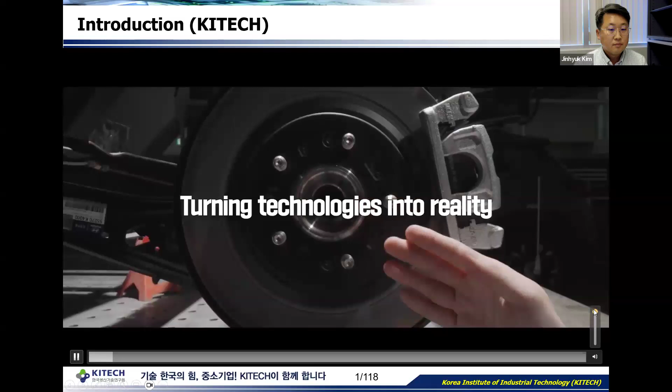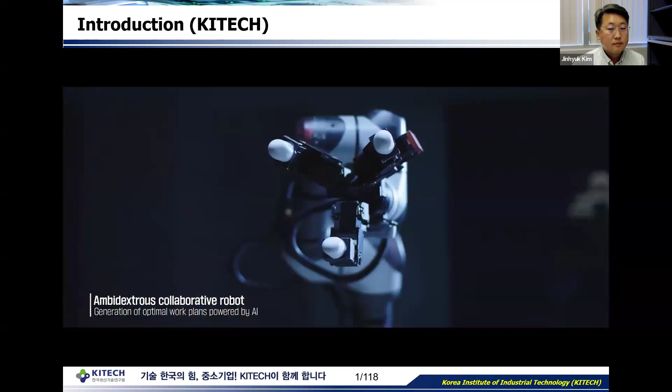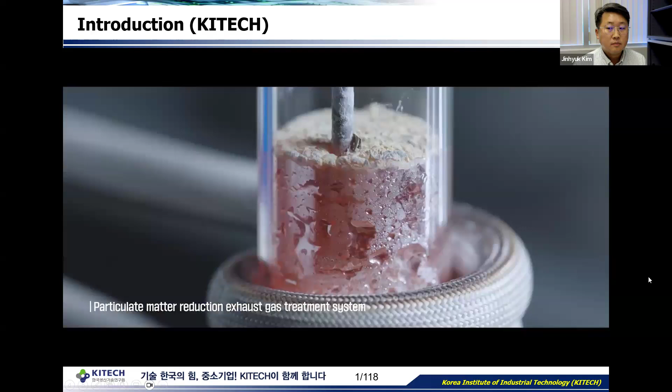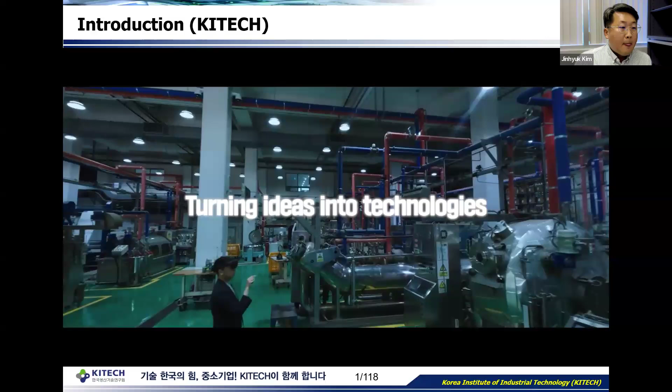What we expect is beyond what we can see, turning ideas into technologies and turning technologies into reality. We dream of future-oriented technologies. We are pushing the limits of production technology, the boundaries of the manufacturing industry, and beyond the carbon economy, leading the manufacturing paradigm shift with new values. Korea Institute of Industrial Technology is an innovator of industrial technology. Amid the rapidly changing paradigm shift in manufacturing, KITECH has grown to become a global partner in the innovative growth of the domestic manufacturing industry by developing technologies for autonomous manufacturing, servitization, carbon neutrality, and hydrogen alliance. We are redefining the productivity revolution to lead the value revolution in manufacturing. Beyond automation, we enable flexible and rapid production with autonomous systems and design optimized processes with digital twins to increase business competitiveness. We incorporate cutting-edge robotics and manufacturing technologies to create safe and reliable industrial environments. We're expanding business models by adding value to the manufacturing industry. We developed SMILE production technologies to help manufacturers enhance their R&D and design competencies and expand related services such as distribution and sales to generate high added value profits. We develop low carbon emission control technologies and industrial environmental management technologies through field demonstrations across various industries and sectors. Our research capabilities span the entire hydrogen energy cycle, including production, storage, transportation, and utilization. We seek to build a sustainable future driven by carbon neutrality and hydrogen alliance in response to global climate change. We enhance the global competitiveness of Korean manufacturing through strategic global collaborations. We are transforming the future of industrial technology by expanding joint research and human resource exchanges with overseas offices, as well as strengthening the link to commercialization through technology transfer and infrastructure development. We will accelerate the implementation of autonomous production systems by conducting joint research with leading technology countries, preparing for a sustainable future by developing integrated hydrogen and carbon system technologies. We contribute to the creation of industrial and innovation ecosystems by supporting domestic small and medium-sized manufacturers' global expansion and promoting industrial technology innovation for local manufacturing. The future is shaped by many technologies, but our path is singular. A path that transforms ideas into technologies and technologies into reality. A path leading from traditional manufacturing to an era of unprecedented value creation. At the forefront of this journey, KITECH will advance beyond production towards true value. Korea Institute of Industrial Technology.

This is a very interesting animation because we recently updated it. So, Korea Institute of Industrial Technology is a South Korean government research institute that supports advanced technology for domestic industry in Korea. KITECH is mainly focused on developing and managing manufacturing technologies for small and medium enterprises in Korea. We now also have a branch in Silicon Valley, San Francisco, so we always welcome collaboration on research work together.

Now I'm asking you, what is turbo machinery? We can say turbo machinery is rotating machinery like fans, compressors, pumps, turbines, and gas turbines, and so on. Wikipedia defines turbo machinery as machines that transfer energy between a rotor and fluid, including both turbines and compressors. A turbine transfers energy from the fluid to the rotor, while a compressor or fan transfers energy from the rotor to the fluid.

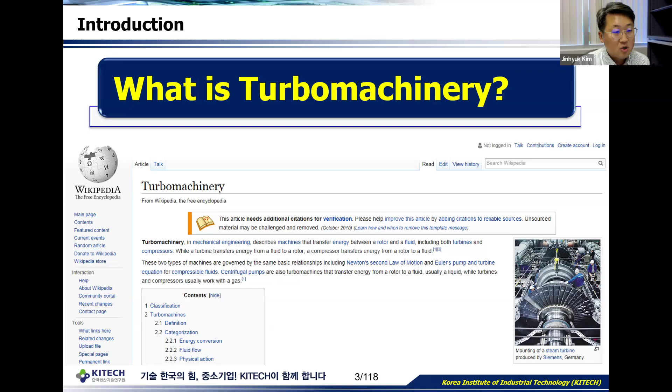CFD means computational fluid dynamics, which is a section of fluid dynamics in mechanical engineering. However, with the recent development of computing power, CFD is rapidly being used to solve fluid mechanics problems in detail. CFD can also replace direct experimental testing to design an initial model or optimum model in more detail.

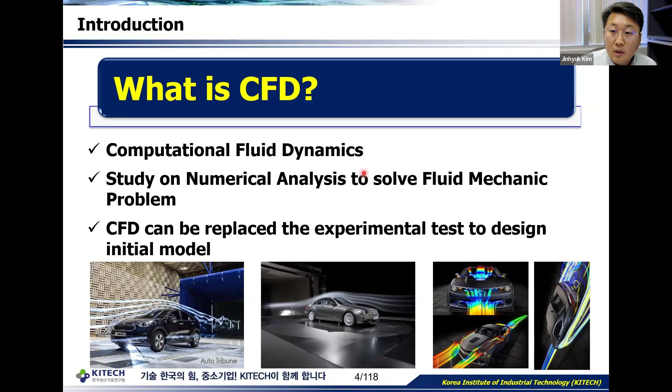Okay, so I will do next slide.

If we use CFD, we can design all kinds of turbo machinery like fans, compressors, pumps, hydraulic turbines, and pump turbines, because we can easily understand the internal flow characteristics using CFD techniques. There are many types of turbo machines, like centrifugal type, axial flow type, regenerative type, and mixed flow type. They are employed to achieve the best performance for various types in the requested field.

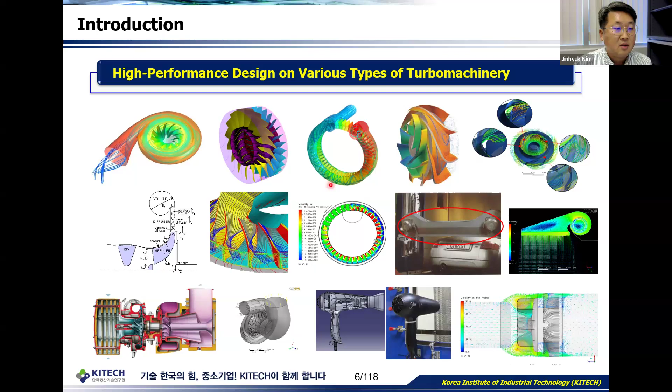So this is the introduction. I have professional skills and work capabilities for fluid machinery like fans, compressors, pumps, hydraulic turbines, and pump turbines. I'm also very interested in investigating internal flow characteristics and flow physics using unsteady CFD techniques.

I'm also very interested in analyzing performance using flow visualization. I have practical hands-on experience with energy machinery through experimental and analytical investigations. I have successfully performed more than 34 research projects, and I'm currently doing 2 research projects as principal investigator. I have also published more than 120 technical journals and more than 75 patents on kinds of energy systems.

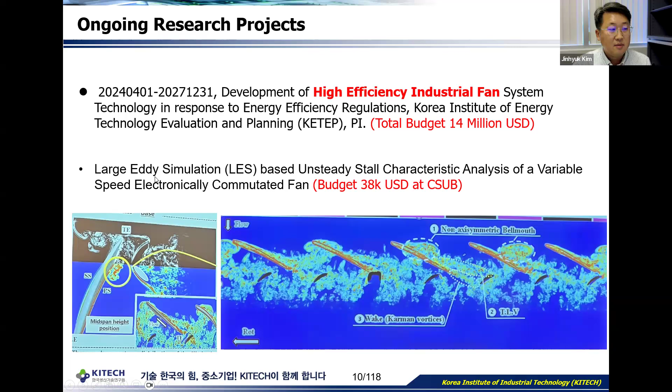In the first project, I brought small research items to do work at CSUB. Now I'm doing research work together with Dr. Gyeong Sung Kim, who is a faculty member at the Department of Physics and Engineering, to investigate unsteady stall characteristics analysis based on variable speed electronically commutated fans using LES large eddy simulation techniques.

In the second project, I brought small research work for investigating cavitation flow analysis of axial flow pumps using unsteady large eddy simulation techniques.

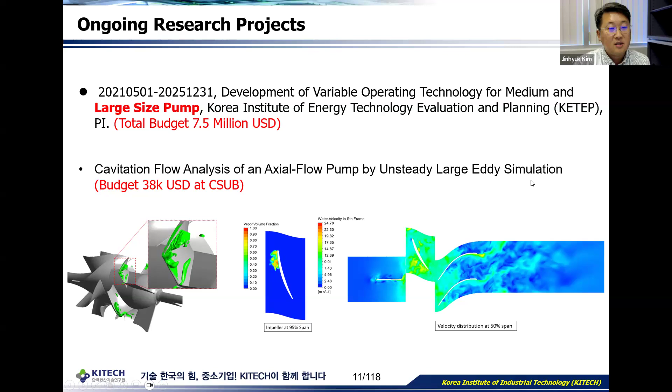I'm very interested in developing various fluid machines using experimental and CFD methods combined with design optimization techniques. My research field covers fluid machinery, aero and hydrodynamic and aeroacoustic designs for compressors, fans, pumps, hydraulic turbines, and pump turbine units, based on unsteady flow visualization and experimental techniques, as well as advanced statistical optimization techniques.

So this is the next major research. Right now I'm trying to develop various pump types: single channel pumps, two vane pumps, and axial pumps. Almost all these pumps are already commercialized in Korea now.

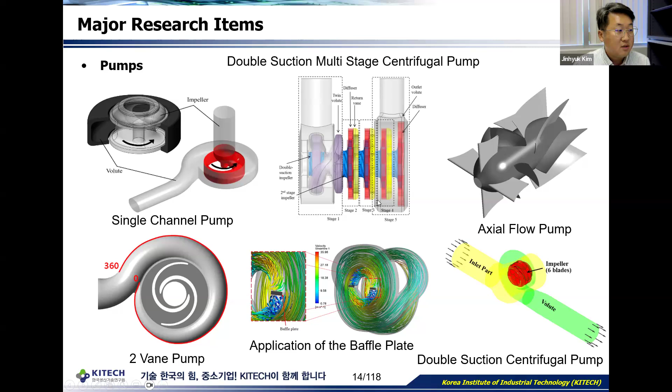Recently we have constructed an experimental test facility to investigate the internal flow characteristics and physics mechanism in more detail. We have also captured the cavitation phenomena as shown here, and we are analyzing it in more detail using unsteady CFD techniques. Since we got good results, we recently published a paper in Physics of Fluids. You can see our affiliation with CSUB here. This paper was published in July this year.

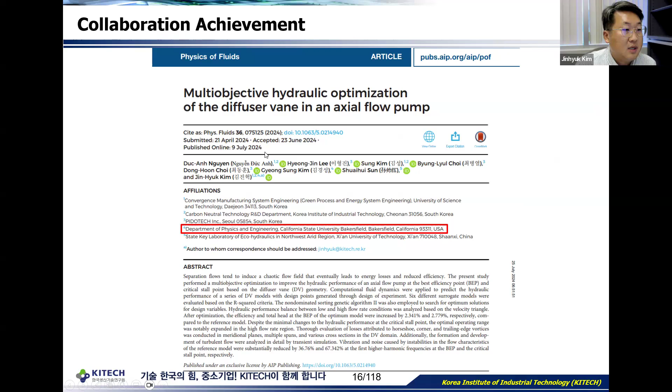This is also one of my research items. I'm working on aerodynamic machines, specifically compressors used for vacuum cleaners and gas turbine systems. But I will skip this part because of limited time now.

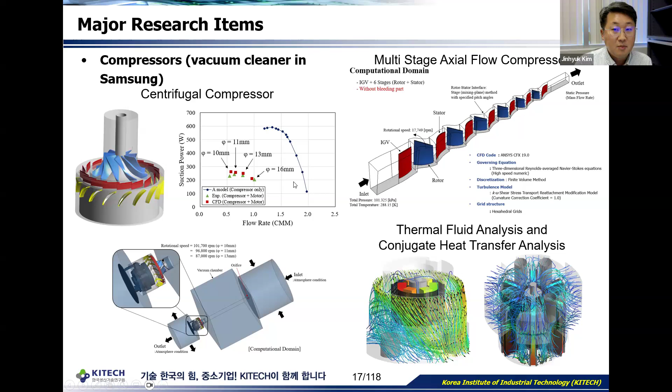You can see here, this is one of my ongoing research works for designing a hydraulic turbine with a very low head condition. If we use only kinetic energy, we cannot get more power because of the Betz limit law, which is one of the basic theories in fluid machinery. However, if we use both kinetic and potential energy in the turbine, then we can get more power.

Recently we have installed a gate here for making an artificial head, so we can also make potential energy. Recently we completed the experimental test here, and finally we got 30 kilowatts of power from this turbine at this river site.

We have also published papers in the Energy and Heliyon journals. If you are interested in this work, you can download them freely on the website.

Anyway, now I will talk about the single channel pump, because this pump is very unique and this is a very interesting topic. I will show you briefly now.

A general submerged pump for wastewater treatment can treat various wastewaters from industrial and living sewage. However, the existing blade type pump has many problems, especially breakage and breakdown because of clogging phenomena. When we encounter clogging problems, pump efficiency first decreases with motor overload, impeller abrasion, and pump damage occurs.

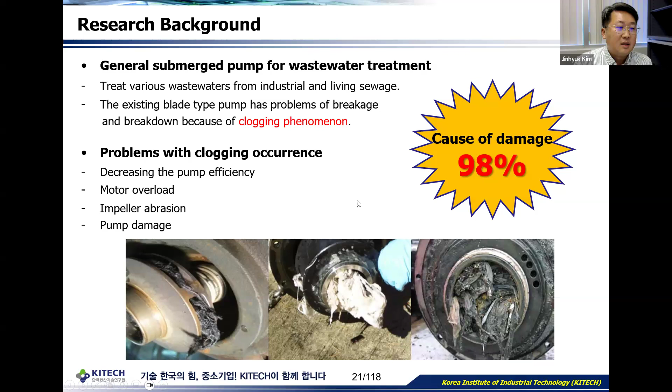This accounts for almost 98% of breakdowns in this pump. So how can we prevent the clogging problem in the pump?

Firstly, we can consider increasing the impeller size. If we increase the impeller size, we can meet the space limitation, but pump input power also increases, and cost will be increased as well.

Then we can consider installing a grinder in front of the pump inlet. But this also has a problem because of clogging at the suction with grinder blade operation.

So we can think to use the multi-vane impeller. However, if we use the multi-vane impeller, we cannot secure the flow path because we have to send solid materials through this pump. If we use a vortex pump, we can secure the flow path, but pump efficiency is decreased because of the small impeller.

So we have to develop the single channel pump for increasing higher efficiency and to send solid materials smoothly.

This is the design theory for the single channel impeller and volute, based on the Stepanoff theory, which is one of the basic theories for designing fluid machinery. At this time, I have also invented a design method for the cross-sectional area shape and distribution for designing the high efficiency model.

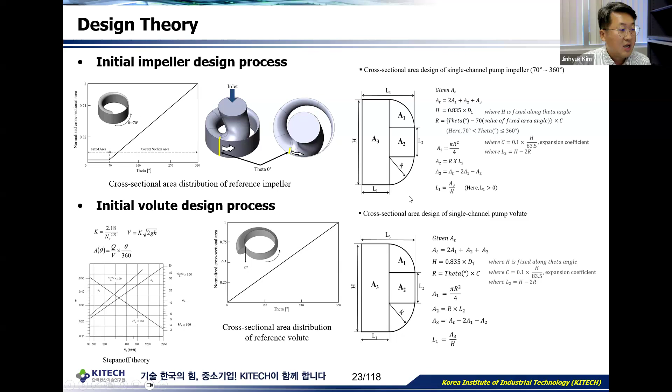So we can think about the optimization procedure to improve the performance of this pump. Firstly, we define the problems, for example, geometry generation, grid dependency test, and performance validation.

Also, we can choose the objective functions. In this work, we have to simultaneously increase hydraulic efficiency and reduce fluid-induced vibration, because this pump has a non-symmetrical impeller shape. Since the non-symmetrical impeller shape is rotating, we can get very big fluid-induced vibration. So we have chosen three design objective functions: hydraulic efficiency, the sweep area of radial force during one revolution, and the distance between the origin and center point.

If we minimize these two objective functions, we can directly reduce fluid-induced vibration caused by rotor-stator interaction. We also choose the design variables.

At this time, I have chosen 5 design variables for smoothly changing the cross-sectional area distribution for both the impeller and volute, using the Bezier curve. Then we employ the Latin hypercube sampling method, which is one of the design of experiments methods, to make the combined design points.

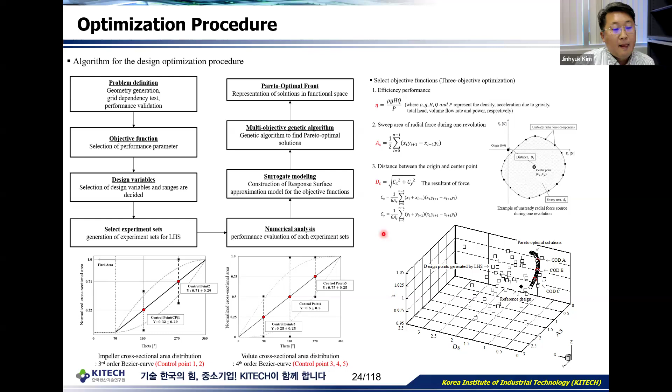Also, this is the radial force source distribution. You can see the COD-A model is decreased considerably, and the radial force is rotating almost near the origin of this graph. This is also the unsteady radial force fluctuation during one revolution of the impeller. You can see the COD-A model has an almost uniform shape.

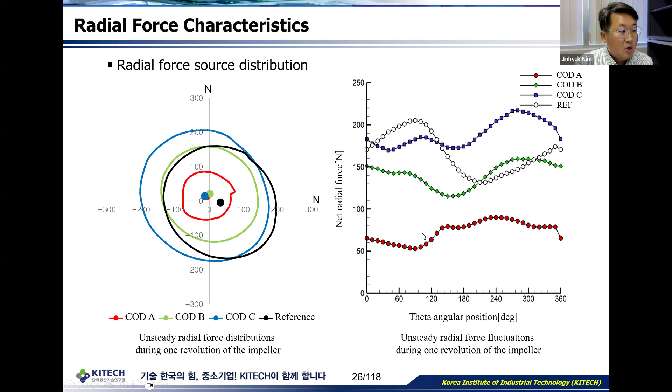A few years ago, I published a book chapter about our new technologies, titled 'State-of-the-Art Design Techniques of the Single-Channel Pump for Wastewater Treatment.' If you're interested in my new design technology, you can freely download it from the website.

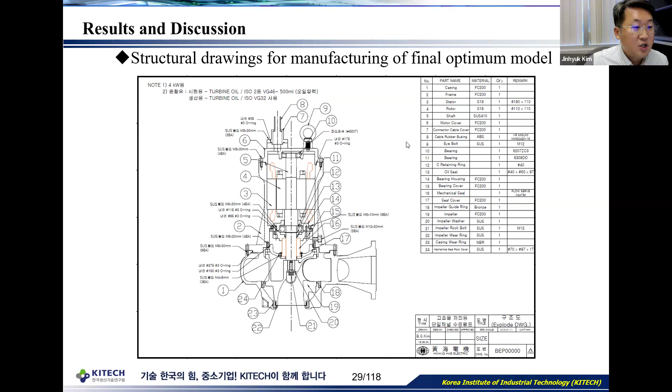This is the structure drawing for manufacturing the optimum model, since we have to verify real performance for commercialization. This is also the three-dimensional modeling for manufacturing our final optimum model, along with the structural analysis for manufacturing.

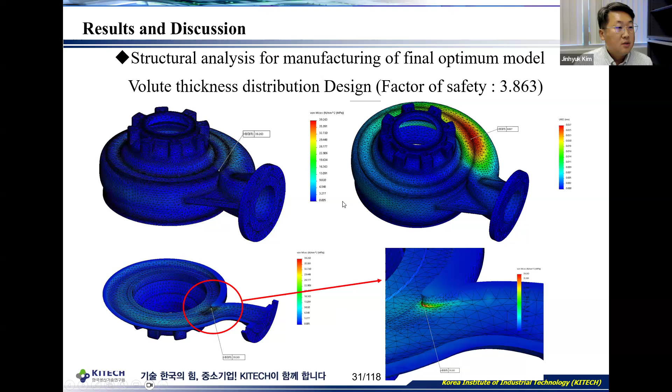Rotor dynamic analysis is also very important, because we have to decide the location of the bearing and the thickness of the shaft shape and axis, as well as check the dangerous velocity zones.

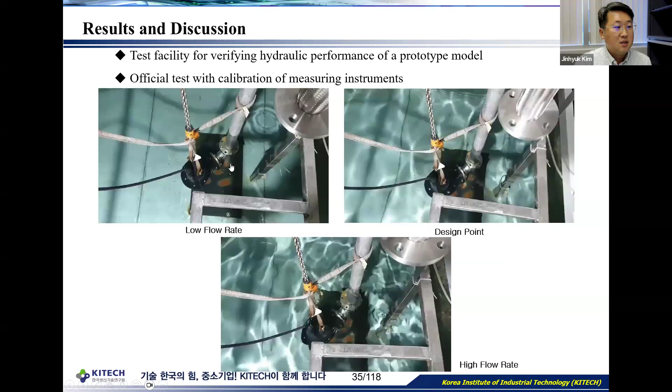Vibration was reduced remarkably here. The wave on the surface is due only to the discharge flow rate from the outlet pipe. So we got a very good result.

We got also good results and found the very low fluid-induced vibration mode right here.

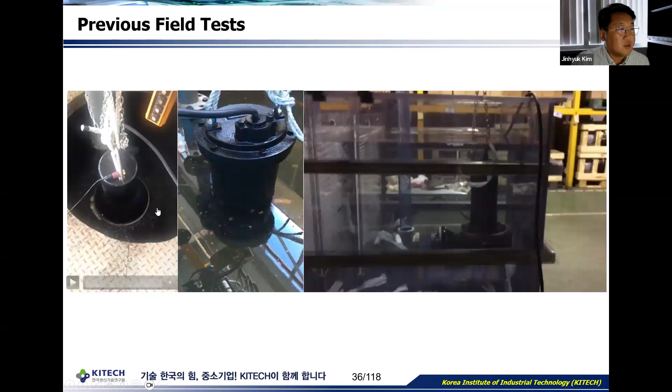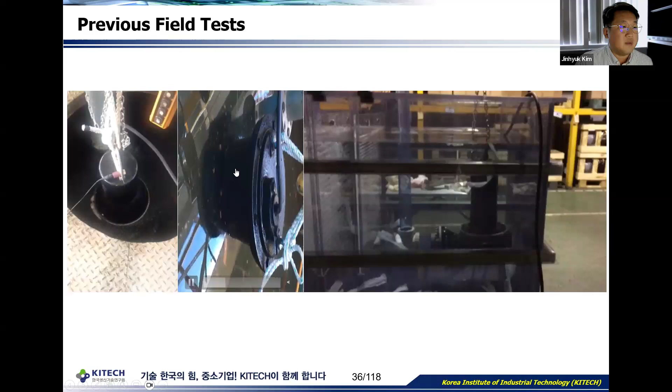For clearly explaining now, you can see here the left animation. If we do not consider our design techniques, then there are so many vibrations caused by fluid-induced vibration due to the rotor-stator interactions. However, if we consider our design techniques, then you can check that we got a very low fluid-induced vibration mode right here.

We have also checked sending wet tissue as the solid materials. You can see here, wet tissue is also smoothly driven right here. So we already verified all performances tested.

Several years ago, we announced this achievement in media reports and newspapers in Korea. Also now our pump is already commercialized in Korea, and there are so many fields and applications using it.

Also, you know, in Jeju Island, this pump is being used popularly.

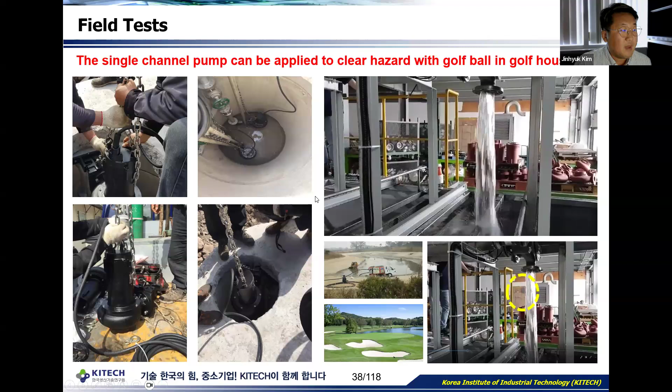So there are so many applications. Recently our pump is being employed in many golf houses in Korea now.

At this time, we got many good results from this research work, so we have published so many papers. If you are interested in this research work, you can download them from our previously published papers.

This is also ongoing work, because this pump can also be applied as a turbine. If we use this pump as a turbine, then we can also get power from the wastewater with solid materials.

This is also very popular, because recently a Japan company asked me if it is possible to design or develop this single channel pump as a turbine for wastewater treatment, for generating power from the wastewater. So now we are researching this together.

Now, the positive displacement turbine. Actually, the winter season in Korea is really cold, so we are always using an indoor system like the Korean floor heating system.

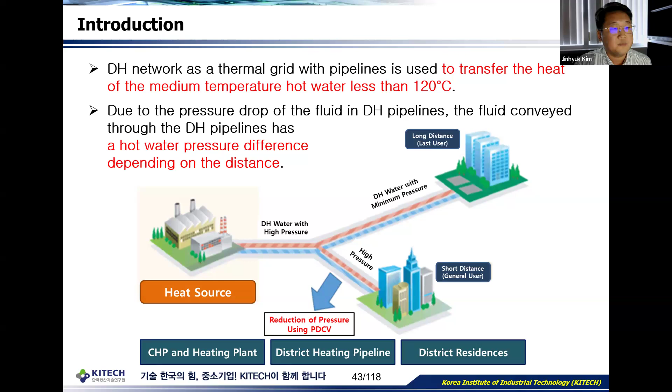Due to pressure drop of fluid in the district heating pipeline, the hot water has different pressure differences depending on the distance. So in the district heating system, the pressure differential control valve is very important, because it supplies constant flow rate from the hot water pressure difference, and also protects equipment like the heat exchanger from high pressurized fluid, and regulates the pressure at each point so fluid can be supplied remotely.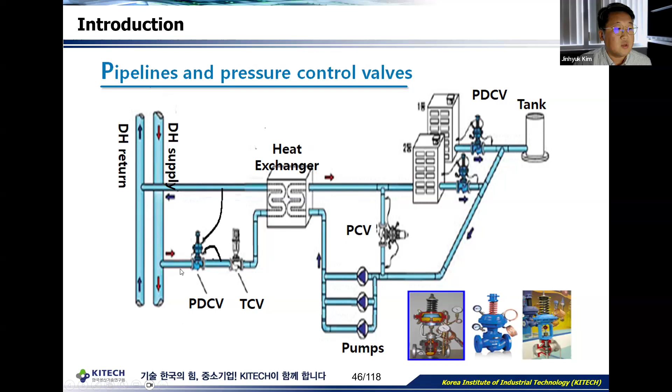Instead of removing these control valves, we can install a bypass line here to install a hydraulic turbine to control the pressure level. If we use the hydraulic power generation system at this site, then firstly we can get some power from the pressure level, so we can supply power to the user, and also save energy.

So the hydraulic turbine system is suitable as a replacement for the positive pressure differential control valve in district heating substations. There are so many advantages. For example, if we use the hydraulic turbine system, firstly we can control the pressure and temperature, and also supply the pump inverter to send power.

This is most important for measuring the flow rate, because in the heating district system there are very complicated conditions. They need very hot water, very high pressure, and very low flow rate. So if we install a flow meter to check the flow rate, the flow meter may break. So we have to check the flow rate efficiently by using a hydraulic turbine system.

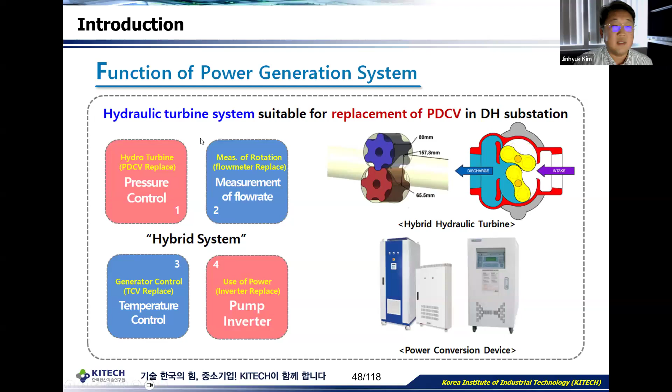I will introduce this briefly now. This is the specific speed. When we check the specifications for designing a hydraulic turbine, first we have to check the specific speed, because specific speed can decide the turbine shape or turbine type.

If the specific speed is very big, we can choose the axial flow type. However, if the specific speed is very low, we have to choose the gear type. As I told you previously, this condition is very complicated. Specific speed is low because high pressure and lower flow rate are required in this condition, so we have to choose the gear type for designing this turbine.

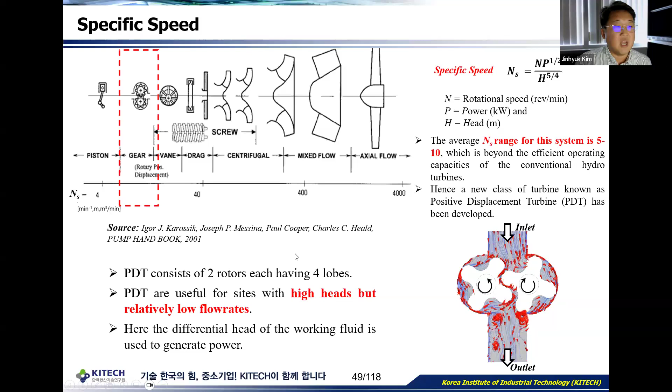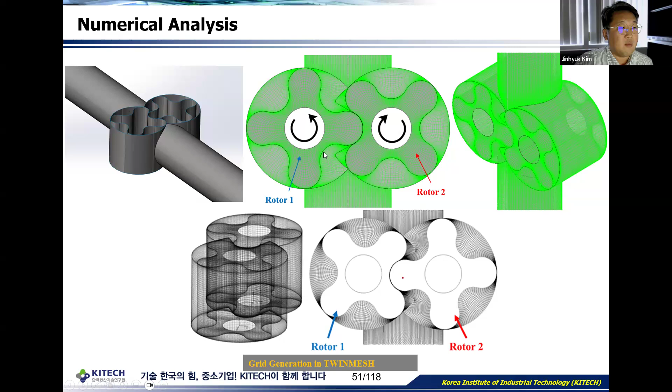I generated a mesh for calculation using CFD, and employed the moving mesh technique. This is an example of our result. You can see high pressure coming here, then two rotors rotate due to the high pressure, and the two rotors gain some energy. Then low pressure goes outside from the outlet right here.

But this is very interesting. You can see there are very big separation zones at the outlet here. These separation zones have an adverse effect on the performance of this turbine, so we have to reduce this adverse effect to improve the turbine performance.

When we check the result for this reference turbine, there are big pressure fluctuations right here, at the inlet and outlet, because this turbine shape is based on the rotor lobe type and the straight type. When we look from the outlet, the area always changes, and this can create much higher pressure fluctuation.

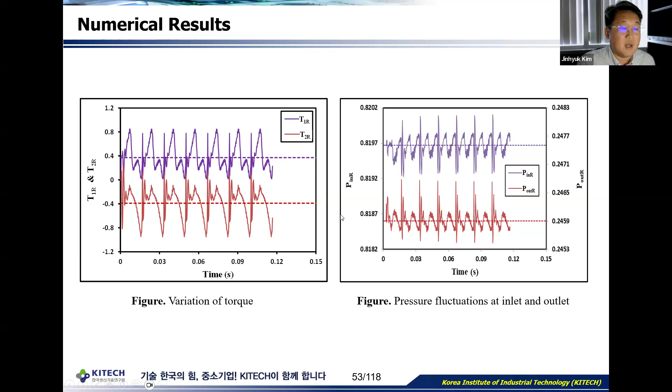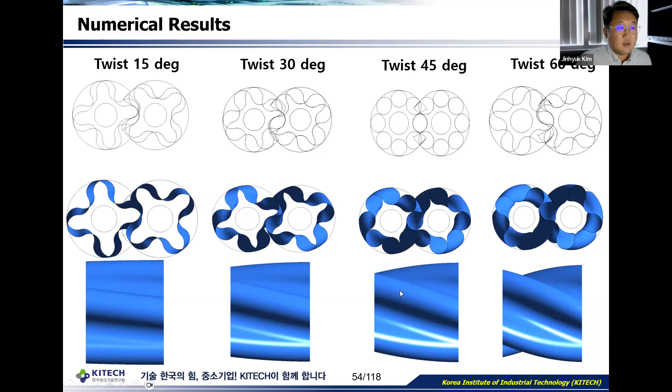So how can we reduce the fluctuations from this turbine? We tried a parametric study with the twisted angle from 15 to 60 degrees, like a screw type shape. If we use the twisted angle model for this turbine, we can considerably decrease the pressure fluctuations. Especially the 45 degree twisted model can reduce it perfectly.

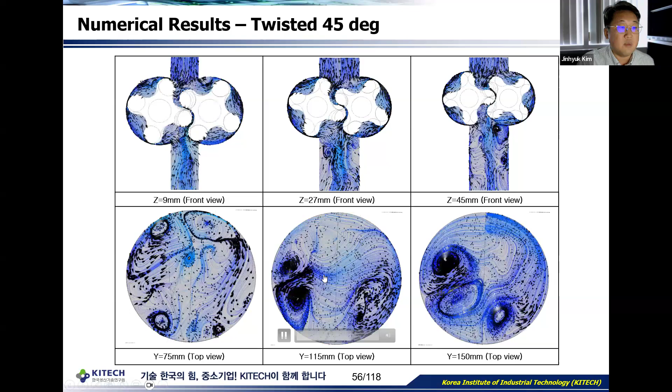This is the example for the result of the flow characteristics. You can see if we use the 45 twisted rotor shape, when we look from the outlet, the area is almost the same as the rotation of the lobe. Also the pressure fluctuation can be reduced perfectly like here. So this is a very simple idea.

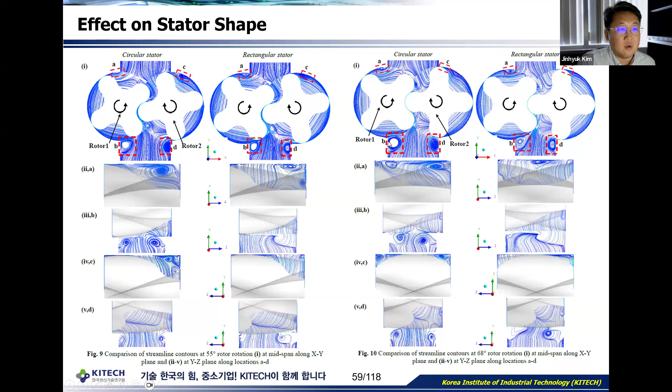We also checked the internal flow characteristics. This is the example - you can see here the two separation zones were reduced considerably compared to the previous model.

We also checked the effect of the clearance size, because clearance size is very important for the turbine performance. Also, since we are handling hot water, we have to consider the heat expansion rate for both the rotor shape and the casing shape, because the two shapes use different materials. So we also have to check the clearance size.

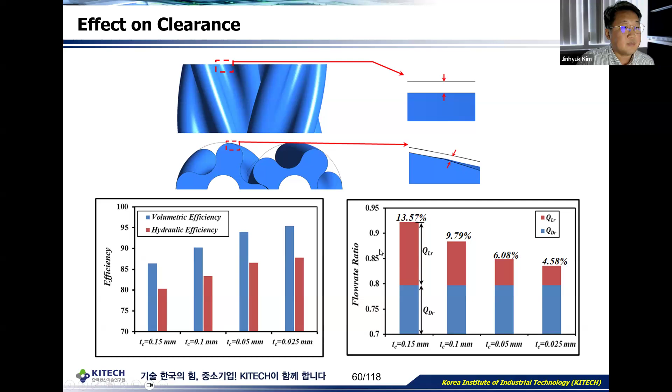So this is also the schematic diagram for the experimental test. This is the main tank, and I have installed a heater to increase the temperature. Also, this is the booster pump for making the artificial head, and these are the two reservoirs. This is our prototype model, and we can install pressure and temperature sensors from inlet to outlet for checking some parameters.

And this is our turbine, and we can install the RPM sensor and torque sensor to check exactly the turbine output. This is the generator, and we installed a load bank for controlling the power by using many resistances.

Also, this is the magnetic flow meter to measure the flow, and we can also install a heat exchange reservoir to control the temperature inside, because this is a closed loop system. So when we do the experimental test for a long time, the temperature will increase, so we have to control it using the heat exchange reservoir right here.

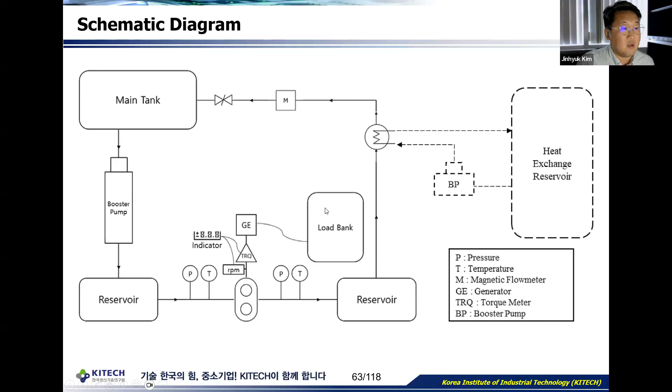So I have manufactured all devices right here in my institute, and I have tried the experimental test exactly. At this time, all devices were calibrated to get accurate data. So this is our final prototype model.

You can see here, high pressure is coming in, then two rotors can be rotated from the high pressurized rate right here. Then we can check clearly some parameters from all the devices. Finally, we have chosen the 45 twisted model right here.

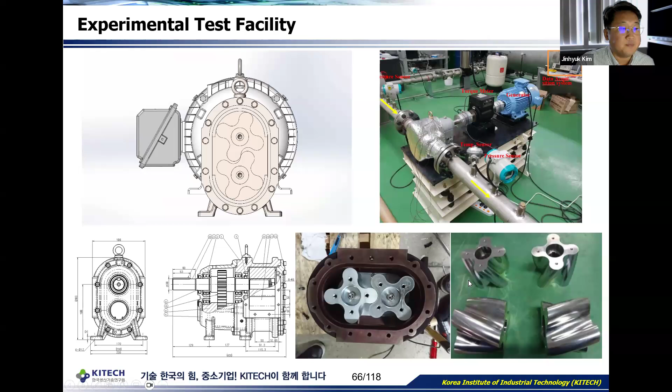Also, this is our validation results. You can see here, our CFD results are in very good agreement compared to experimental test data. So our CFD technique is very reliable and gives accurate data.

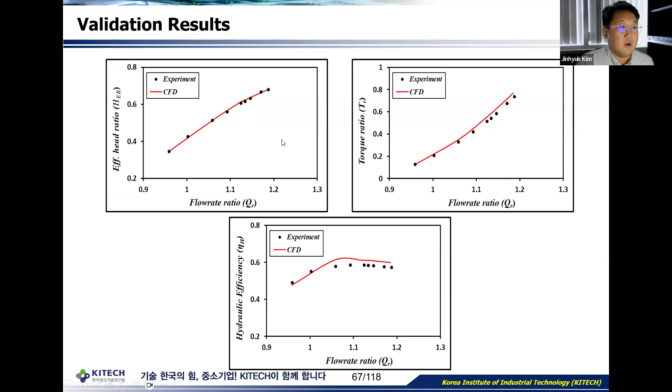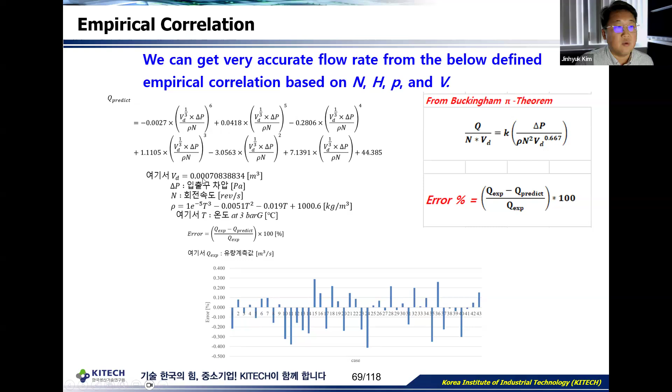So finally, we can get a very accurate flow rate from the below defined empirical correlation developed using Buckingham Pi theorem. So without the flow meter, we can get exactly the flow rate by using the empirical correlation. This is also the performance curve map with different temperatures. You can see here, finally, we can develop the empirical correlation to predict clearly the flow rate using this turbine.

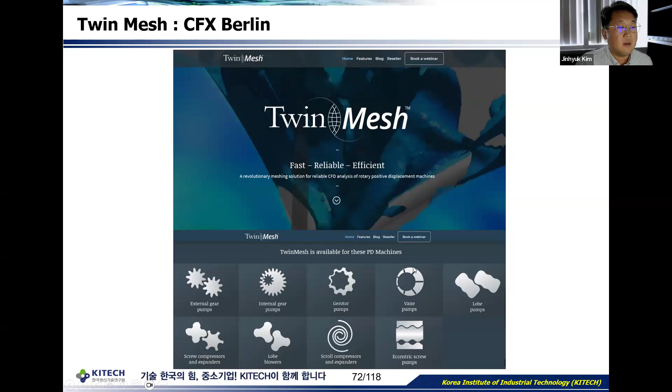So now we are trying the real field test to check durability and reliability right here. At that time, I collaborated with a Germany company named CFX Berlin. They provided the Fortran code for generating the moving mesh of the lobe type shape. They also announced our achievement on their blog and homepage, so you can refer to that. Also, one of my PhD students got a PhD degree from these works, and we published many papers, so you can refer to these papers.

So this is the Francis turbine. Actually, hydropower plants play a vital role in electricity generation, which accounts for 16% of worldwide power generation. Hydropower plants have many advantages for sustainability, storage reliability, nature friendliness, and flexibility.

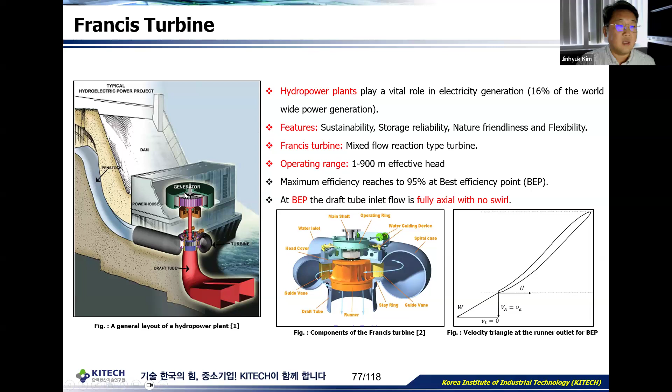You can also check the Hoover Dam, because this is a similar hydropower plant right here. High pressurized flow comes in, then rotates the runner, and the runner is directly connected to the generator, and then we can get energy from the power right here.

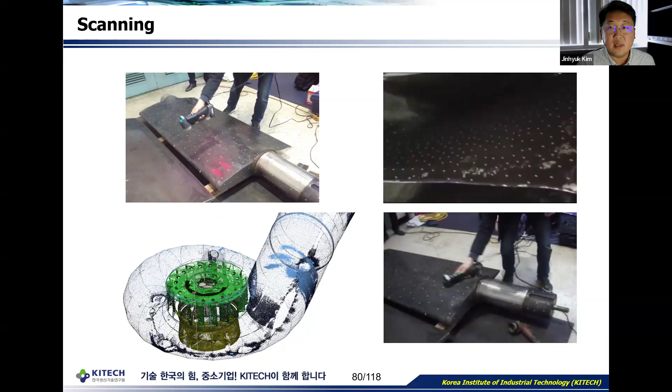This is the schematic diagram, I will skip this one. At this time, we did not get any information because this turbine system was manufactured 70 years ago, so we had no information data. So at this time, we tried 3D scanning to get some information, and we got some 3D modeling here.

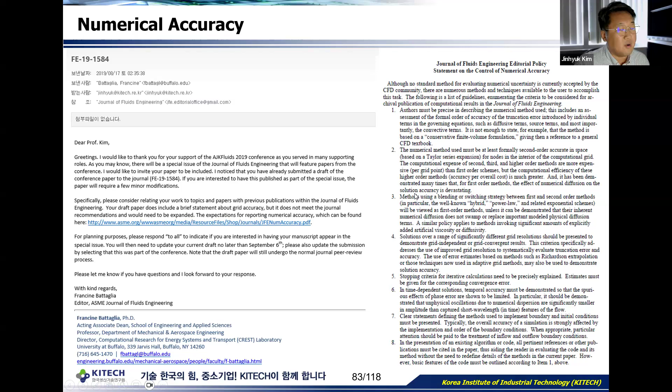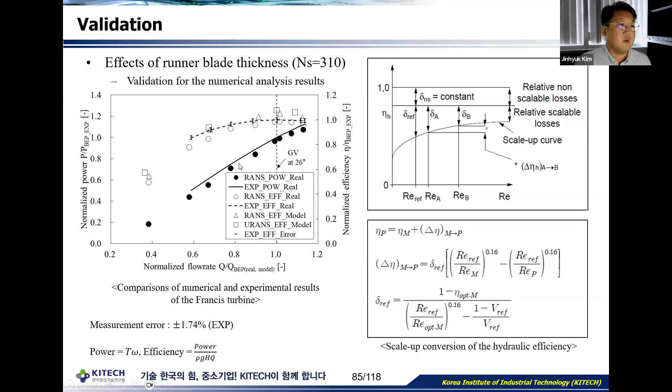However, for checking numerical accuracy, Professor Battaglia, who is the editor of the Journal of Fluids Engineering, recommended using the grid convergence index method as the editorial policy of the journal. So at this time, we tried the grid convergence index method to get the optimal number of grids right here. We tested the validation because we had to verify our numerical result for reliability. Our numerical result is in very good agreement compared to the experimental test data right here.

At this time, our mission was to investigate the unsteady cavitation characteristics by installing an anti-swirl fin at the draft tube. So we employed a long fins, short fins, and no fins on the draft tube walls to check the cavitation problem. When we tried the unsteady simulation, you can see here.

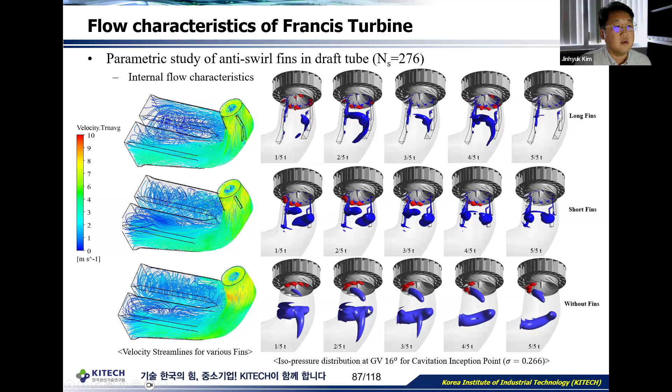When we install the long fins, we can considerably suppress the vortex cavitation rope compared to the reference without the fins. For checking it more clearly, if we install the long fins, we can clearly reduce the vortex cavitation rope compared to without the fins.

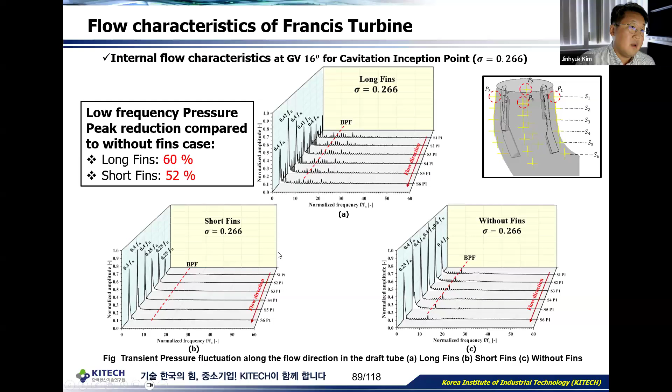We also tried to check the internal flow characteristics and frequency characteristics. As you can see, a frequency of less than one is almost always caused by the vortex cavitation rope. But if we employ the long fins, we can reduce it by 60% compared to without the long fins. So we can considerably suppress the vortex cavitation.

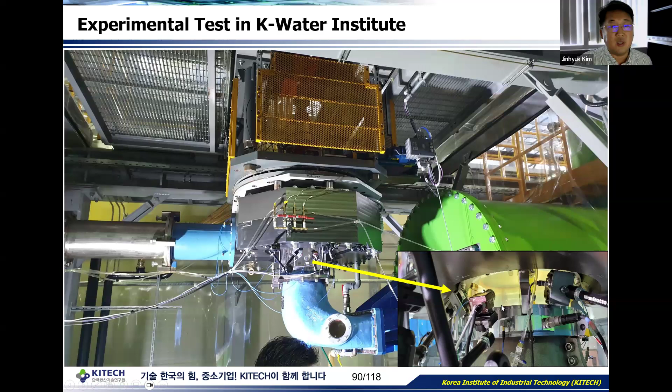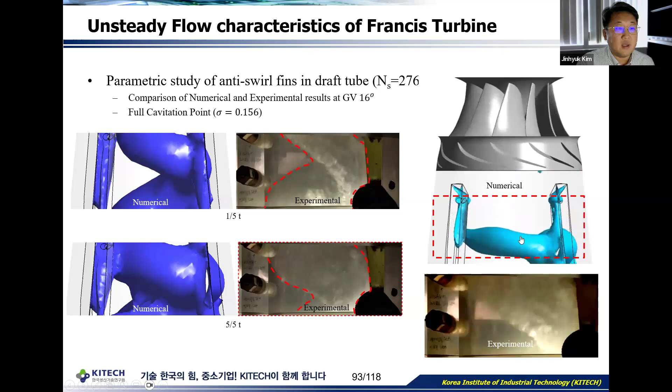From this work, we have published many papers. If you are interested in more detail about our research work, you can download our papers. So this is the pump turbine, our latest model.

Pumped storage generally operates by transferring water from the lower to upper reservoir using idle power in pump mode during light load times, then saving energy and discharging water in turbine mode during peak load time. However, recently pumped storage is increasingly used to provide stable power supply with constant frequency, responding to fluctuations in renewable energy sources such as solar and wind power, which have been increasingly added to the grid over the last several decades.

In this pump turbine, it's very important to investigate the cavitation problem, because at many operating points they can frequently meet cavitation. So it's very important to check the cavitation in more detail.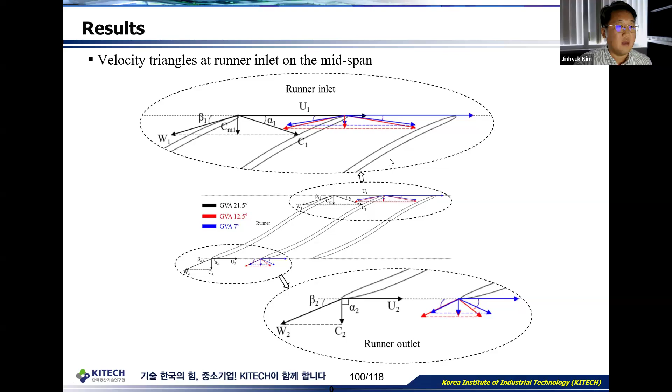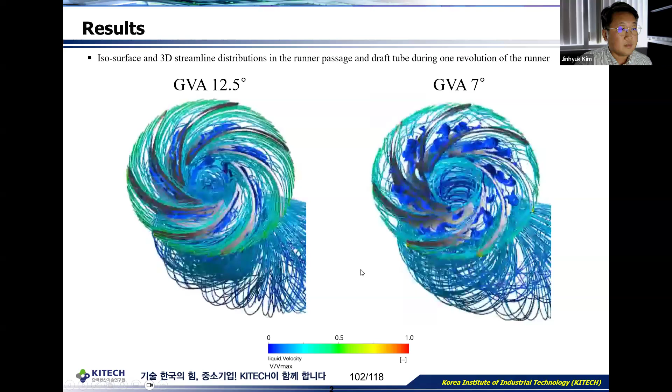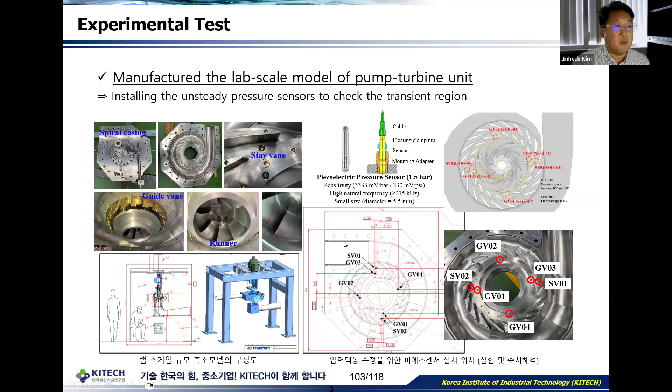I also manufactured a lab scale model for checking the internal flow characteristics of the cavitation problem in more detail. At that time, I installed 6 unsteady pressure sensors to check the transient region in more detail, simultaneously with the performance. This is our experimental test facility.

At this time, I also installed a high-speed camera to capture the flow motion simultaneously, and all devices were synchronized to capture all these performances for more detailed analysis. This is the result of the hydraulic performances.

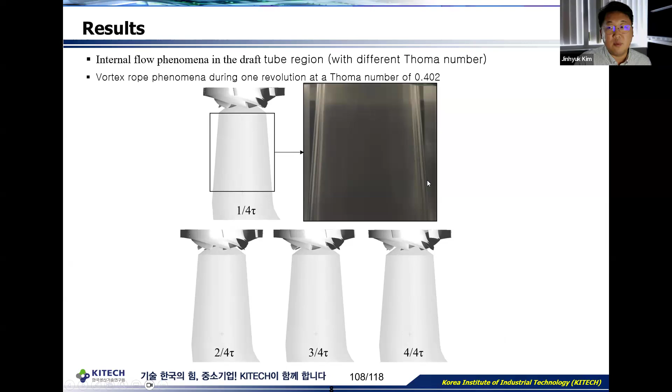We also analyzed more in detail the frequency test results, and we checked the vortex rope phenomena during the revolution at different cavitation numbers. You can check this: we have captured the cavitation phenomena very well, and our CFD techniques also captured it very well. So from this work, we can analyze more in detail by using the CFD techniques.

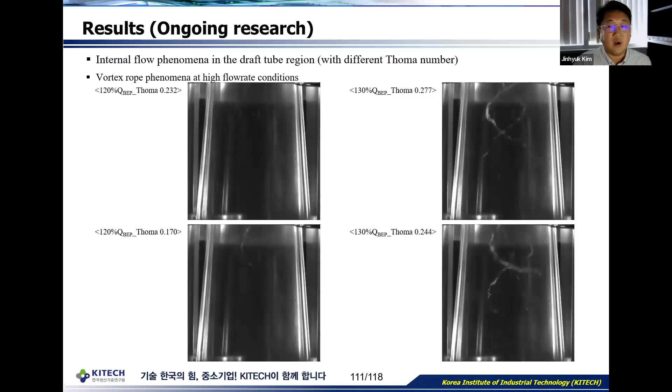There are also two vortex ropes right here, but this is our ongoing research work. Now we are analyzing more in detail with other conditions for the turbine test, and also trying to analyze using the CFD techniques. At this time we have published many papers, so if you are interested in our work, you can check our papers.

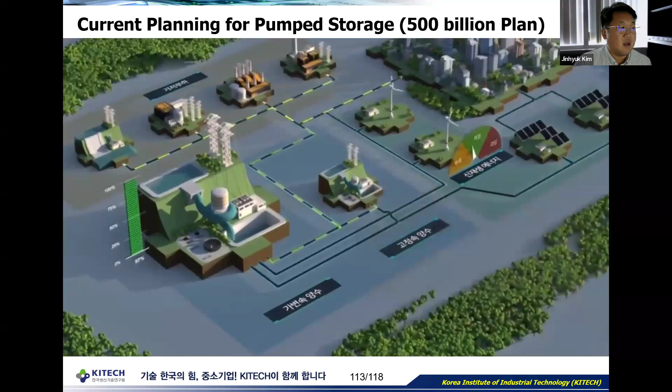This is my last slide. Now we are currently using a power plant as the base load, and recently we are using solar and wind energies as renewable energies. Actually, renewable energy provides electric power intermittently, and the quality is not so good. So if we combine renewable energy with a pumped storage system as the backup device, then we can provide suitable energy efficiently. This is our final future energy system.

So now I would like to finish my presentation. Thank you for your attention.

Thank you very much, Dr. Kim, this is very informative. I want to ask if the audience has some questions, but I do see a very interesting question on the Padlet.

One question is, why did you choose CSU Bakersfield as a site for your visiting scholar work? Thank you for your nice question. As I know, Bakersfield industry is mainly focused on agriculture and chemistry, so they need so many fluid machinery like pumps. At that time I discussed with Dr. Kyung-Sung Kim, and he also needed to develop many types of pumps for application in Bakersfield, so I chose this region. Actually now I'm doing my research project here to develop many kinds of pumps. If I have a chance, I will discuss with some companies, because in Bakersfield there are many pump companies, so maybe we can discuss developing and commercializing our pumps here. That's why I chose Bakersfield.

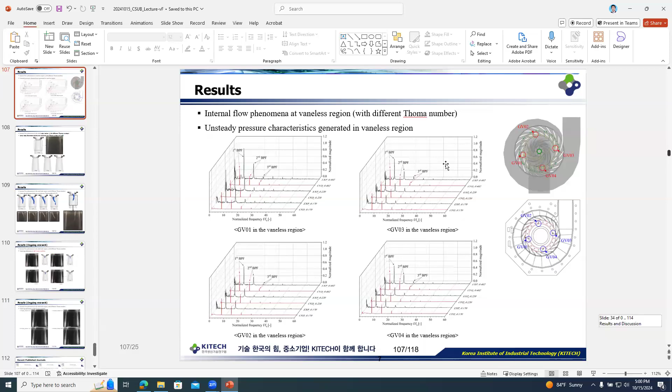Dr. Kim, I have a quick question for you. This is Danan Sani. For your single channel pump, do you have any published data or from previous research a comparison of the pump performance curve for this new design versus a standard pump design?

Yes, of course, I have published many papers, but at that time I normalized all the values, so I cannot announce my real performance test results. But if you want to get information, I can send it to you privately. I was just curious, based on the performance data, whether it is comparable to the standard design. Yeah, of course, yes.

Yeah, okay, that's all I wanted to ask. Okay, thank you. Thank you so much, Dr. Kim, we would like to give you a round of applause.